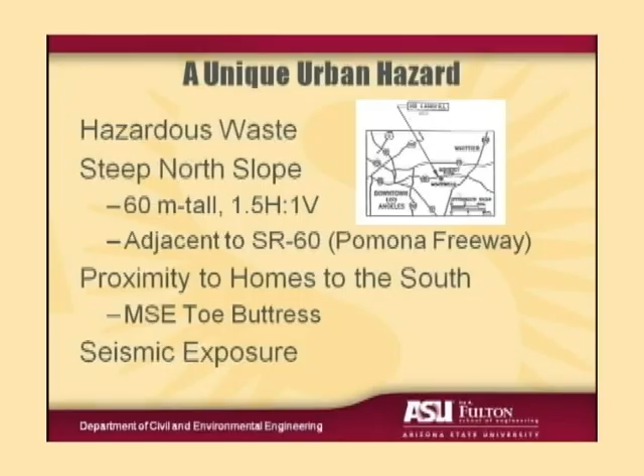And then there was a relatively severe seismic exposure for this site that I'll talk a little bit more about in a minute.

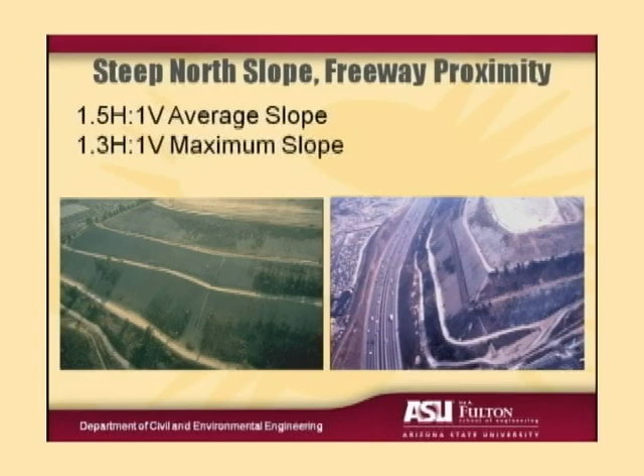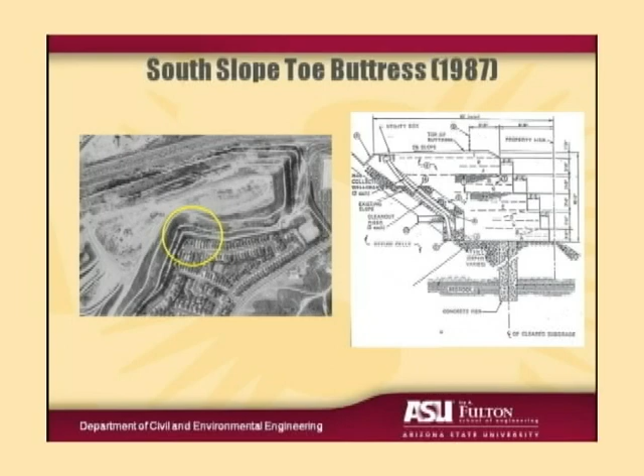The south slope toe buttress I mentioned, you can see in the yellow circle the proximity of the homes in that corner of the landfill. The developer had built right up to the landfill property. So a 15-foot high reinforced earth wall was constructed by Woodward Clyde Consultants in 1987, designed by Woodward Clyde, as an interim measure while the legal issues that always surround a Superfund site were being pursued.

In 1987, the Whittier Narrows earthquake occurred, and this earthquake was really a watershed event in terms of seismic hazard for the whole Los Angeles region. You know, California, everyone knows what the San Andreas Fault is, or most people do. It's what we call a transform boundary between the North American plate and the Pacific plate, and movement along that boundary is predominantly horizontal.

However, in the Los Angeles area, the fault makes a little turn, and the seismologists and geologists refer to that as the Big Bend. And so while the fault displacement is primarily lateral along the fault, in the area that bends, some of that has to be accommodated in thrusting by movement perpendicular to the fault. And that thrusting creates the San Gabriel Mountains over there on the left, and the Sierra Madre Fault, which breaks up to the ground surface.

But the Whittier earthquake occurred on a fault that was not previously recognized, and that had no surface expression. It was buried beneath the ground surface, it had no surface faulting. There were lines of hills at the surface that were a surface expression that in hindsight were an indication there was something going on in the subsurface. But there were no faults visible, and up until that time, the seismic hazard had been based on faults that had surface expressions, that had faulting at the surface.

Subsequent investigations following Whittier indicated that the LA basin is underlain by what we call blind thrust faults, faults that don't break the ground surface. And in fact, the greatest seismic hazard for downtown Los Angeles is one of these blind thrust faults with a capability of a magnitude of about 7, less than the San Andreas Fault, but much closer to the urban areas.

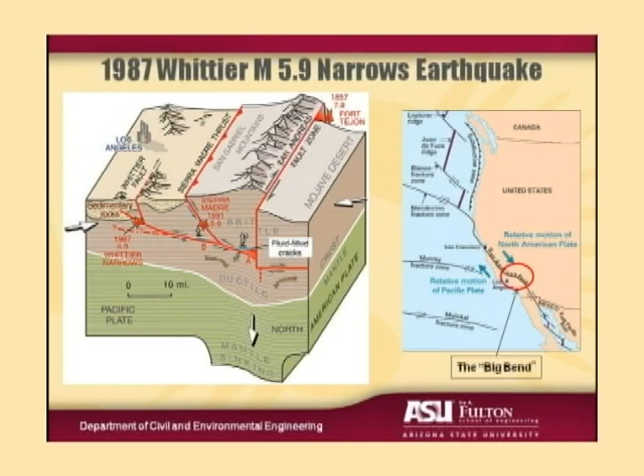And if you see over there on the left, on the ground surface, it says the Whittier Fault. The OII Landfill is right about the F in the word fault, very close to Whittier. In fact, Whittier caused some severe cracking on those benches on the steep north slope of the landfill, which of course triggered additional concerns over landfill stability.

One of the good things that happened after Whittier is EPA's consultant at the time, CH2M Hill, installed some strong motion stations at the landfill, one on top of the waste and one down at the toe of the waste on what they thought was natural ground. And that turned out to be a very fortunate thing.

The instrumentation really paid benefits further down the line in terms of evaluating the seismic performance of the landfill. And as I mentioned, Whittier also led to the identification of this blind thrust fault system that underlay the Los Angeles area. The particular blind thrust fault under the OII landfill was known as the Elysian Park blind thrust. And that represented a significant increase in the already severe seismic exposure of the site.

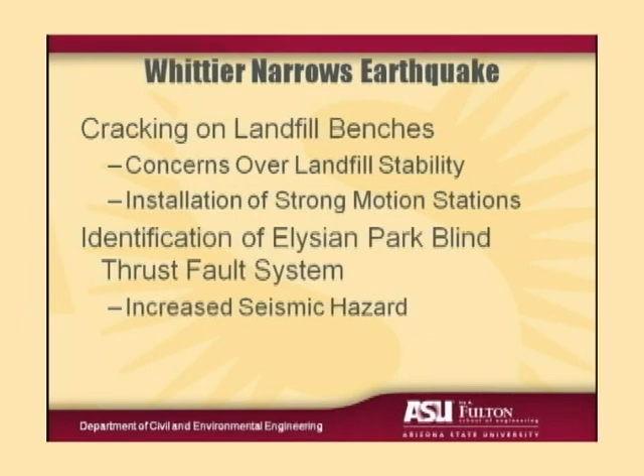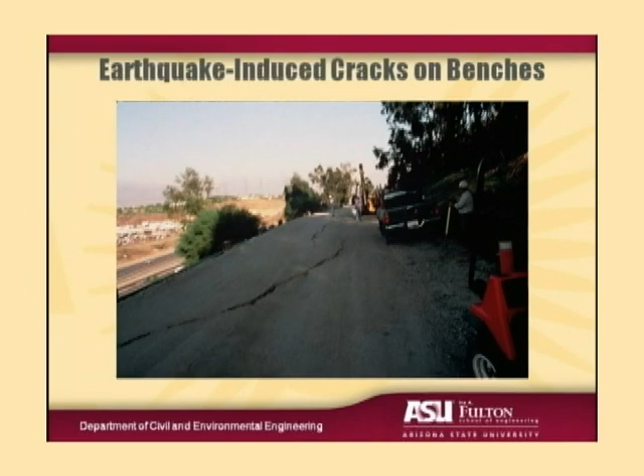Later on, when Professor Stokoe was out there with a 20-ton truck vibrating the ground, when they were on that north bench, I conveniently had to stay in the office that day. I told them, take lots of pictures and send them to me, and I'll check back with you at the end of the day.

So in 1994, my company, GeoSyntec Consultants, was hired to do pre-design analysis for the landfill, a pre-design evaluation in preparation for final design to help EPA decide exactly how they were going to close this site, what needed to be done. Some of the estimates of what needed to be done, including excavating the waste, cutting back to the waste, to a tune of $400 to $800 million. And of course, the responsible parties were hoping we could come up with a cheaper solution.

So our pre-design scope of work had 9 work elements. Of course, the first thing we do is review and synthesize the available information on the site. We had a field investigation program, a laboratory test program. We conducted limit equilibrium stability analyses, a detailed seismic hazard analysis, taking into account the new information on the blind thrust systems to establish a design earthquake for the site, used that design earthquake in a seismic response and deformation analysis for the landfill, conducted a static deformation analysis to see what the landfill would look like 30 years from now.

The responsible parties who were closing the landfill were also responsible for 30 years of post-closure maintenance and care of the facility. We had a specific investigation of the integrity of the toe buttress that was protecting those homes on the south, and then we had to issue a report of findings with recommendations for closure design.

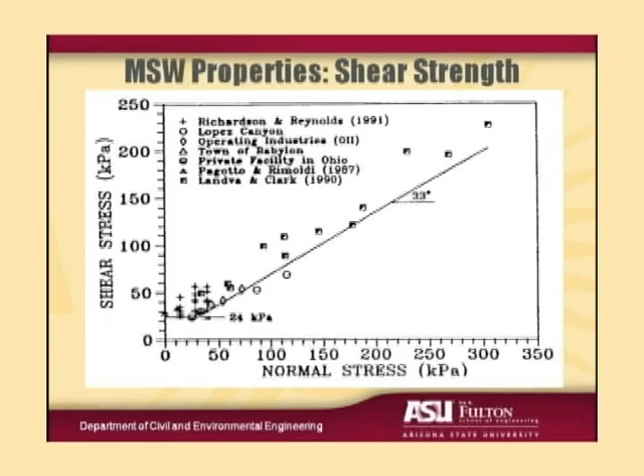This shear strength envelope is now widely used to represent the shear strength of municipal solid waste. So that was one of the first contributions to practice from this project.

We had a very detailed field investigation. As I alluded to, we conducted a spectral analysis of surface wave survey. We hired Professor Stokoe and his team at University of Texas to come and do the survey. We installed 3 34-inch diameter bucket auger borings to depths of up to 155 feet. This isn't cheap. We would have liked a few more borings, but we were able to convince the client to pay for 3 of them, and we did detailed waste characterization of the waste recovered in the bucket augers.

We conducted in-situ unit weight tests on the way down, and we did some video logging of the holes to get an idea of the structure of the waste.

We also did a large test trench at the surface of the landfill, 20 feet deep, 20 feet wide, to categorize the structure of the waste, and then we backfilled it with gravel to get an idea of the unit weight. We weighed the waste that we took out, backfilled it with calibrated gravel, like a big sand cone test, and used that as an estimate of the unit weight.

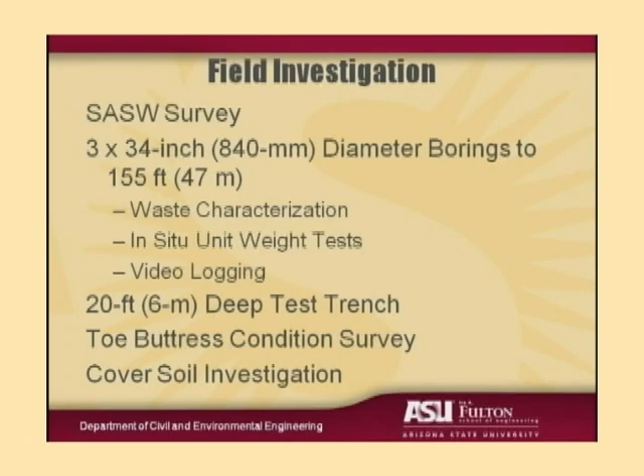We conducted a condition survey of the toe buttress and a very detailed investigation of the shear strength of that cover soil on the north slope.

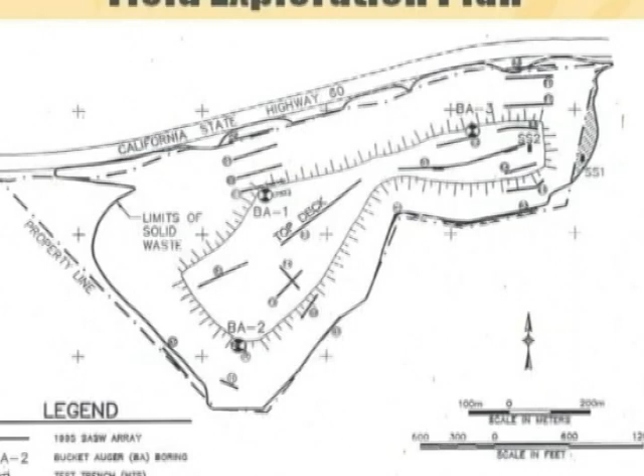BA2 in the lower left is the so-called seep area, southwest area, where the liquid waste was disposed of and where there were seeps on the surface after a heavy rain. BA1 was kind of in a transition zone between the areas where liquid was disposed of and the area where no liquids were disposed of.

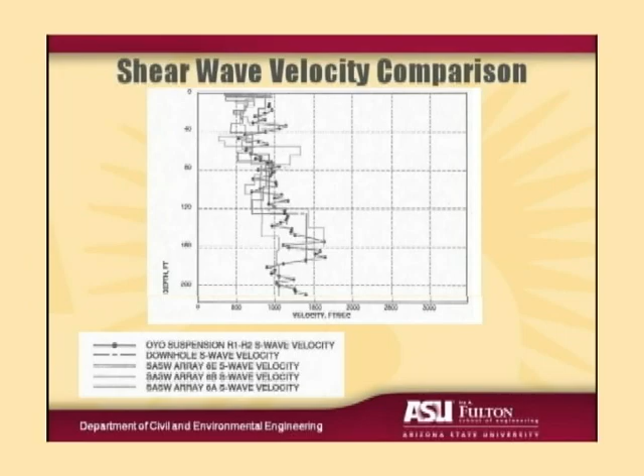Fortunately, SASW, I think people have generally accepted now. In 1996, it was still considered a relatively new technique. But where the seismic station was on top of the landfill, a previous consultant had put in a deep boring and had made downhole shear wave velocity measurements and measurements using the OYO suspension logger, which again was a relatively new technique at the time. So we were able to compare the shear wave velocity profiles from SASW to these other 2 techniques, and as this figure demonstrates, we got very good agreement, so we were able to move ahead using the SASW data with good confidence that it gave us results comparable to other geophysical techniques.

One of the things we use the shear wave velocity data for, besides the seismic response analysis, and besides trying to determine what the depth of the waste was, was to plan our sampling intervals.

We took the 27 shear wave velocity profiles we did around the landfill and averaged them. We did a statistical analysis. We got the mean trend, which is the solid line, and the mean plus and minus 1 standard deviation trend. We planned our sampling intervals to sample areas where the shear wave velocity, as measured in the site-specific measurements, was below the mean, close to the mean minus 1 standard deviation, equal to the mean, and greater than the mean, with the belief that this would be reflected by differences in the characteristics of the waste. By doing this, we would be sure to get a broad variety, or the complete spectrum, of the type of waste disposed of at the landfill.

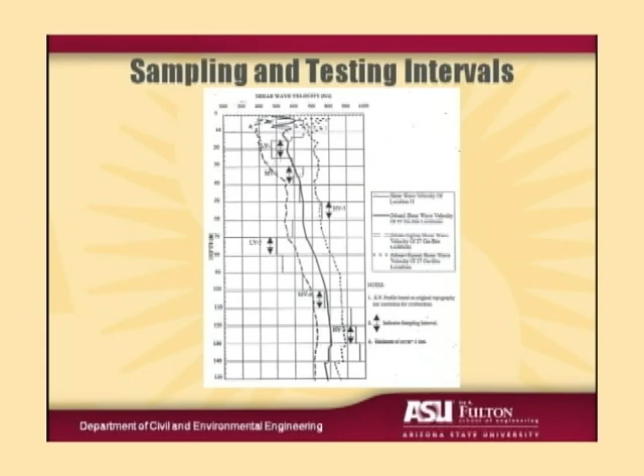So if you look at this figure, we took 6 bulk samples. We had 6 sampling intervals in each of the boreholes, so we took 18 sets of bulk samples. At each location, we did an in-situ unit weight test to capture the unit weight of the waste, and these were the samples we used for our laboratory testing program. The intervals marked LV were the low velocity samples, MV were the medium velocity intervals where we sampled, and HV were the high velocity intervals. We had 2 of each in each of the 3 borings.

The borings were done with a 34-inch diameter bucket auger, the big bucket auger. Typically we use these things in Southern California for slope stability investigations.

In the weak sedimentary rock, we put the big bucket auger holes in, then we put our geologists in a little cage, send them down the hole, and they map the strike and dip of the strata. They love it, they get real excited about that. But for some reason, they didn't want to go down these holes. I'm not sure why. We had trouble convincing the geologists to go down.

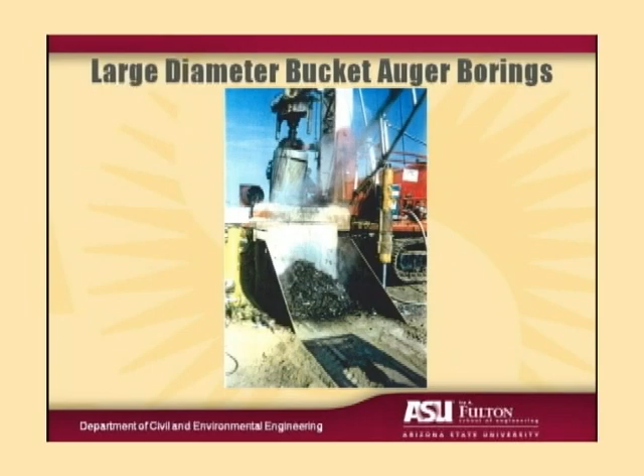As the waste came up out of the hole, we would empty it into this metal bin, and our field engineers would do detailed logging of the waste. We actually had to develop a waste classification system, since there is no standard waste classification system for solid waste. So we went through the literature, collected best practices, and put together this field classification scheme for the waste as it came out of the bucket auger.

It was classified in terms of its moisture content - damp, wet, or standing water in the hole - its compaction based upon how it fell out of the bucket, and the state of degradation based primarily on newspapers and printed material.

In fact, over in the boring in the dry area of the landfill, we pulled up two pristine tickets to a 1956 presentation of Cinderella in downtown Los Angeles. I wanted to go back to the box office and get a refund, but they told me that theater had been torn down about 15 years before and quite possibly now resided in the OII landfill.

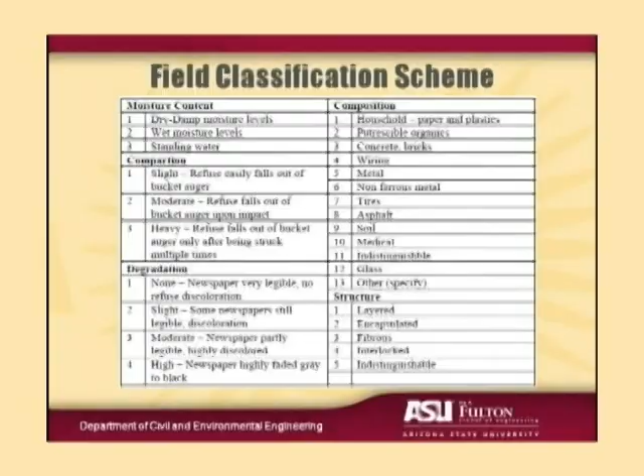We also categorized the composition of the waste. We had 13 compositional categories, including, of course, the other category. Sometimes we were able to capture the structure of the waste, whether it was layered or the solid waste was encapsulated in a soil matrix, although most of the time we used category 5, which was indistinguishable.

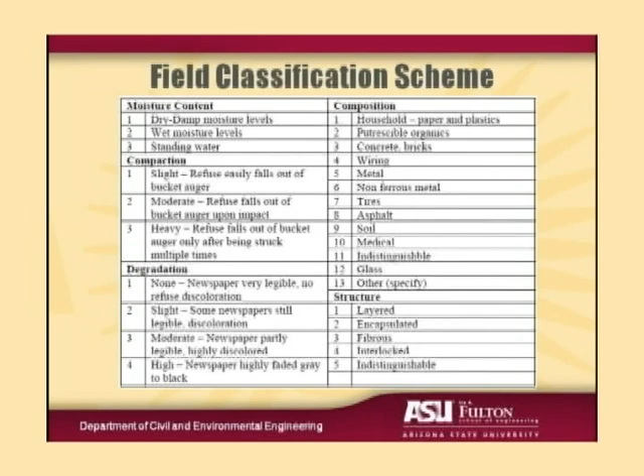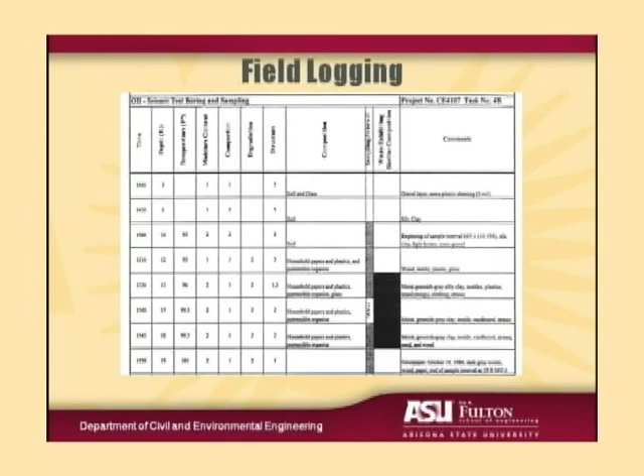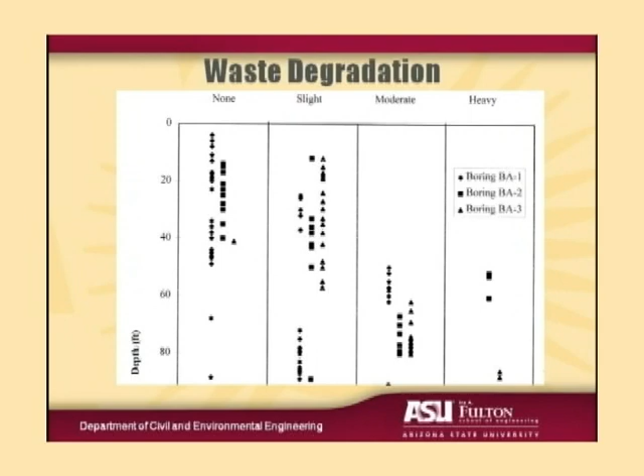We would hit pockets of standing water at shallow depth, punch through those pockets, and then encounter a dry zone with relatively undisturbed waste. So there was a very inhomogeneous character to the waste in the landfill.

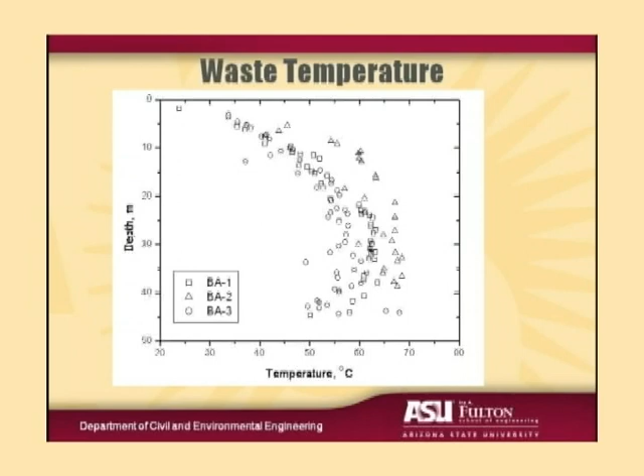Waste temperature is another important indicator of degradation. Anaerobic degradation produces temperatures on the order of 50 degrees centigrade, while aerobic degradation produces temperatures sometimes as high as 80 to 85 degrees centigrade. If you look at this temperature plot, note that BA2 is down in the wet zone, where we had a lot of moisture, and that's where we had the highest temperatures and greatest degradation. BA3 was at the dry end of the landfill, where temperatures were lowest but still elevated - you go down in the hole and it's 60 degrees centigrade, about 150 degrees Fahrenheit.

So the landfill was cooking. The waste was clearly degrading.

We developed an in-situ unit weight test that we've since used at several other landfills. It was basically a big sand cone test. We would auger the waste over a predefined interval of the borehole, typically 3 to 5 meters. The waste that came up in the bucket auger over that interval would be weighed at the landfill scales. We would put a tremie pipe in the hole and tremie in a calibrated, uniform gravel that we had previously calibrated to establish the unit weight at which it falls into the hole. We would weigh the amount of gravel put into the hole, weigh the truck before and after, and take the difference to back-calculate the solid waste unit weight.

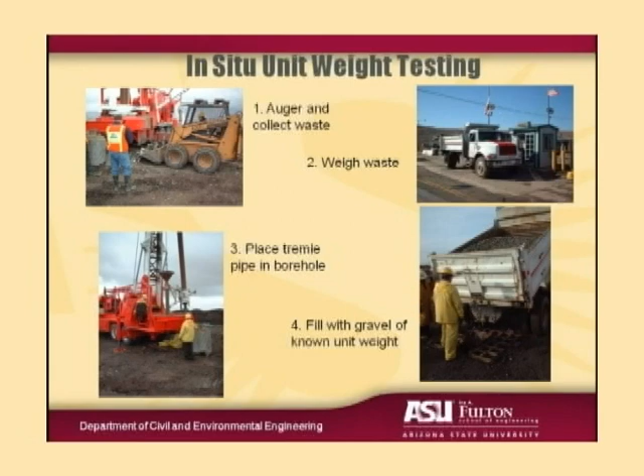That was some great field data for us, and we've since used that at several other landfills. There was a paper that appeared in the ASCE journal about a year ago on the unit weight of municipal solid waste that talks about this procedure and presents results from some of our landfill investigations.

These were the results at OII, pretty scattered. Typically you would expect the unit weight to increase with depth, if you had a uniform material. So the somewhat random nature of these unit weights reflects the variability in the waste.

We also show the unit weight we got in that large test trench at the surface. For engineering purposes, we characterize the unit weight as 15.7 kilonewtons per cubic meter, about 100 pounds per cubic foot for those who still work in imperial units. Importantly, that's significantly higher than the unit weights people used, and still use, in practice today.

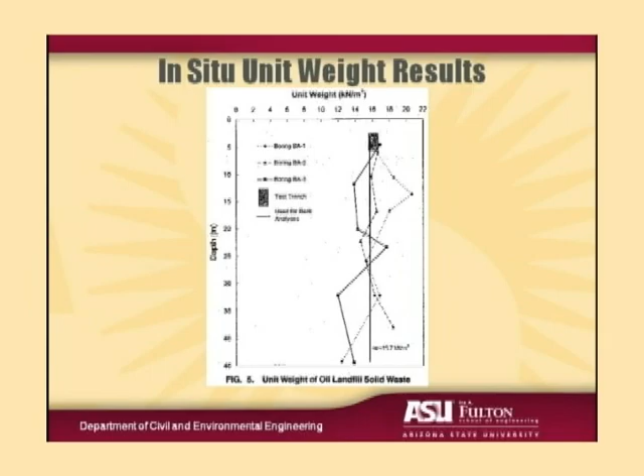Whenever I review these landfill designs, it's a battle. People go in at 55 pounds per cubic foot, and I say let's use 100, and we usually wind up about 85 to 90. But every time we go out and measure it, we tend to find it up in this range. In fact, working with Professor Stokoe, we correlated the shear wave velocity to the unit weight and got a pretty good correlation.

We used that correlation to take our shear wave velocity profiles and translate them into a unit weight profile for the landfill. The dark squiggly line is the mean value. We're also showing the mean plus one standard deviation, the mean minus one standard deviation, and the absolute maximums and minimums based upon this correlation.

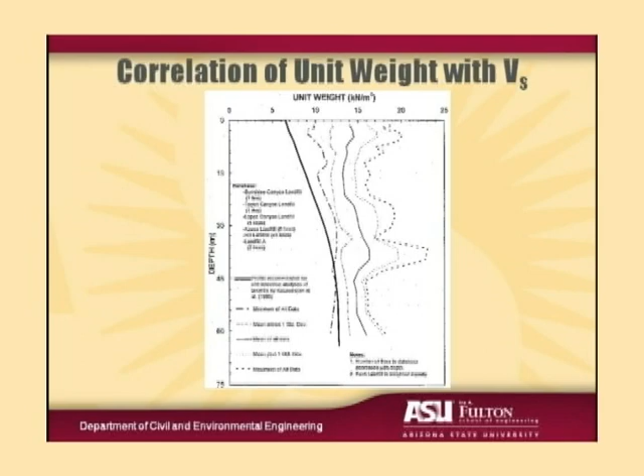The very dark line on the left was a unit weight profile we had proposed about 3 years before, without any data, that apparently is still widely used. In fact, when we presented this unit weight information in Europe and said that old 1995 Kavazanjian et al. profile isn't reliable, several of my European colleagues came running up and said, no, we like your unit weight profile, please don't change it. But this is the new story that I'm sticking to.

We did downhole video logging of each borehole. We hired an oil well logging company to come out with their camera and do a downhole video log. So I thought I would take a trip down the rabbit hole with you. Let's see if we're lucky and if we can get the video to work.

Here we are, taking a little trip down a 34-inch diameter bucket auger borehole inside the OII landfill. For the life of me, I can't understand why the geologists didn't want to go down that hole in a cage. And the mist you see in the background is condensation.

Remember, the temperature inside the landfill is on the order of 60 to 65 degrees, very moist due to landfill gas. That was fun, let's do that again.

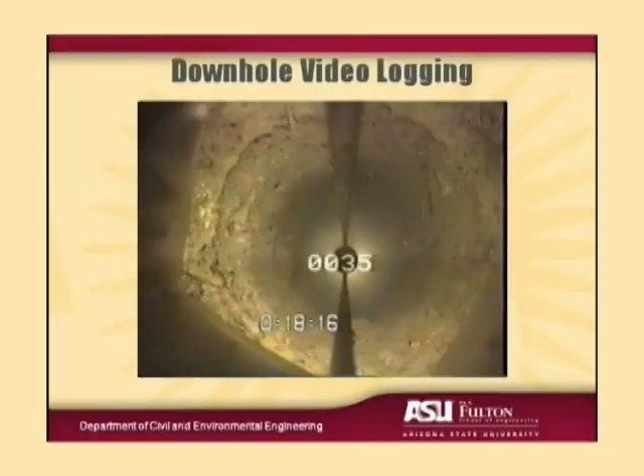I think I've got to cue it up again. You can see the structure of the waste, the relatively horizontal orientation of the fibrous materials, the fibrous waste sticking out of the sides of the borehole.

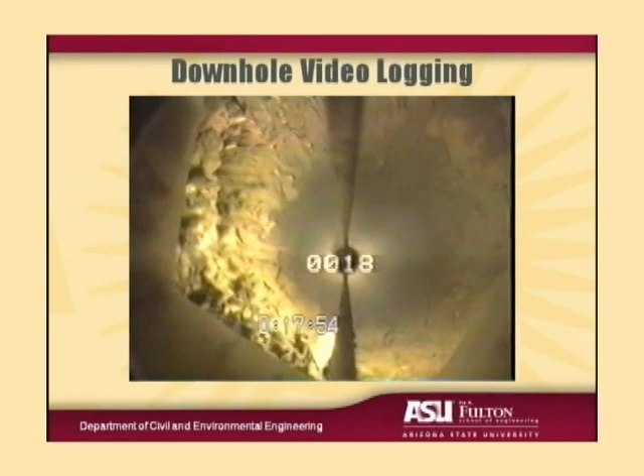That's about a 10-meter segment. The numbers in the middle of the screen, I should point out, show the depth in meters. We logged down to about 40 meters in the 3 boreholes.

Well, we took that waste and did some testing. We constructed an on-site laboratory to test 18-inch diameter, 457 millimeter reconstituted samples. Our original intent was to try and recover undisturbed samples. When the cost of recovering undisturbed samples, our estimated cost of the equipment, got to about $500,000, and we still hadn't figured out how we were going to extrude the samples from the stainless steel cylinders into the testing devices, our client said, come up with a better idea.

So we decided to go to reconstituted samples, reconstituting them to the field densities and then testing them. We had a consolidometer, a direct shear device, and a cyclic simple shear device.

Building that laboratory in itself was a major accomplishment. Professor Landva, who at the time was the leading authority on large-scale testing of solid waste, told us it would be 3 to 5 years before we would run our first test. The GeoSyntec staff in Atlanta, led by Bob Bachus, with help from Rob Swan and Dennis Vanderlinde, designed and fabricated that equipment in less than a year and got the first test going. That in itself was a major accomplishment.

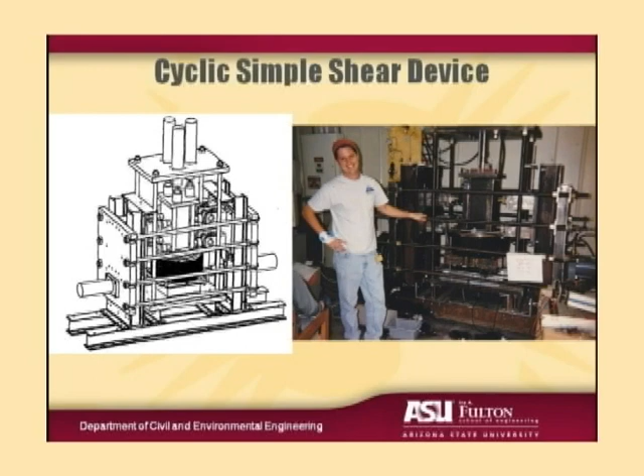After every lab test, we did detailed characterization of the material. We would take the bulk sample, break it up into its constituents, and sort it into paper, plastic, metals, glass, and then what we called soil and soil-like material, because it was a fine-grained material, but there was no guarantee it was soil. In fact, a lot of it was degraded waste.

One of the surprises for us on this project, and it's been repeated on many other landfills, was the large percentage of soil and soil-like material that's in the waste. To a certain extent, it reflects the amount of soil that typical landfill owners put onto the landfill, but it also reflects the state of degradation of the waste. I think at OII, the average amount of soil and soil-like material was on the order of 80% by weight, less by volume, of course.

And we had some samples that were as much as 99% soil and degraded waste material, representing down from the wet end of the landfill and representing a very high state of degradation. And that had an impact on the properties, as I'll show you in a minute.

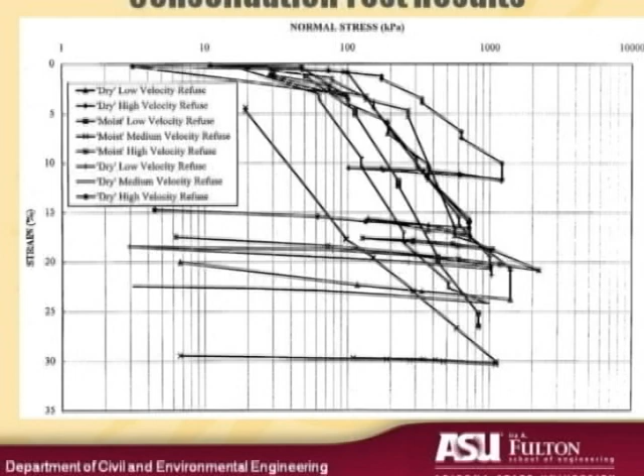These are the consolidation test results, a little bit all over the map. The one thing I'll point out is that on unloading, there's very little recoverable strain. Most of the strain in loading is irrecoverable. So we do the loading and then the unloading cycle, and you can see from that bottom plot, very little vertical strain on unloading.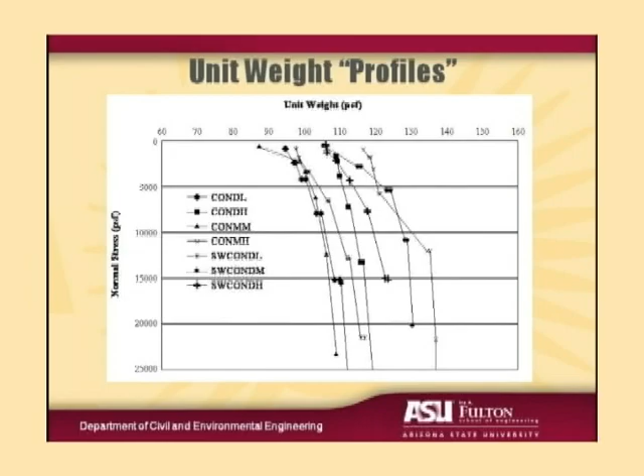If you take an average unit weight of 100 pounds per cubic foot, you take the vertical axis on the left-hand side and just knock off 2 zeros. So 5,000 PSF is 50 feet, and 10,000 PSF is 100 feet. You can see if the waste composition stays constant, you do get a nice increase in unit weight with depth. That's just another indication that the waste within the landfill itself was very variable, which is why we got that high variability in unit weight as we went down into the ground.

These are the direct shear test results. What I'll call your attention to here are the numbers in the boxes. The numbers in the boxes represent the percentage of distinguishable solid waste in the material. So if you subtract that from 100, that gives you the percentage of soil and soil-like material.

At our lower bound envelope, which had a cohesion intercept of 43 kPa and a friction angle of 26 degrees, you'll see two numbers, 1% and 7.8%. Those were samples where between 92 and 99% of the material was soil or degraded waste, and those were the lowest strength materials.

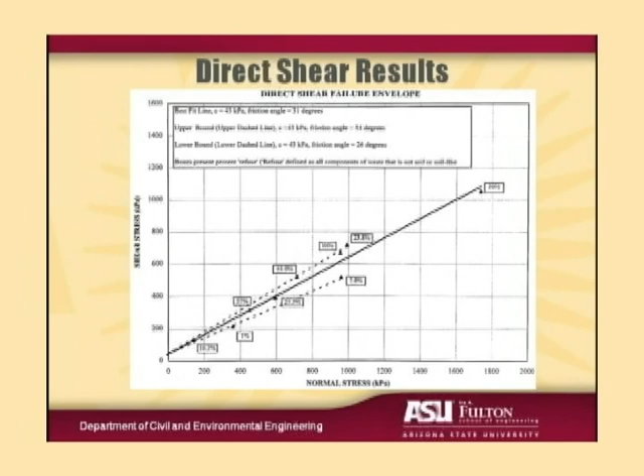The dashed line on the upper bound shows a 90%, and that was certainly the sample with the greatest amount of refuse in it. So there's some scatter in this plot, but there does seem to be a general trend between the strength of the material and the amount of soil and soil-like material versus the amount of waste material. We just completed a collaborative research project with the University of Texas at Austin and Berkeley, where we reconstituted samples with different proportions of refuse and soil-like material that basically confirm this trend in material behavior.

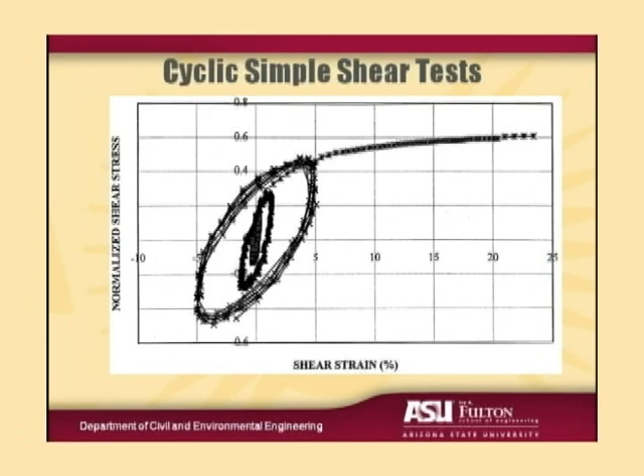The cyclic test, of course, what we want are the hysteresis loops. From the area of those loops, we get the damping. From the secant through the tips of the loops, we get the modulus, the strain-dependent modulus. So we would typically test at 3 different strain levels and then monotonically load the sample to failure.

The lowest resolution we could get in this cyclic simple shear was about 0.1% shear strain. Typically, when you plot this stuff for earthquake engineering, you want to go down to 0.001% shear strain. So the testing gave us the high strain properties of the material.

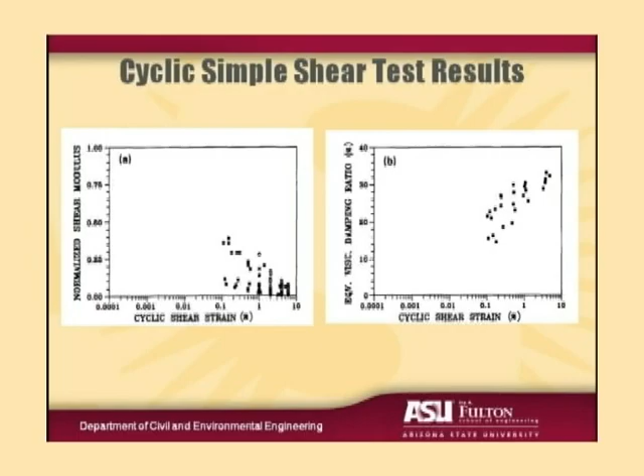On the left-hand side, we're plotting the normalized shear modulus - the shear modulus measured in a test divided by the maximum shear modulus, the small strain modulus. The right-hand side, we're plotting the damping ratio. This was only part of the story, and we needed to fill in the rest of that curve in a small strain range. And that's where the strong motion records came in. Without them, we probably would have been lost.

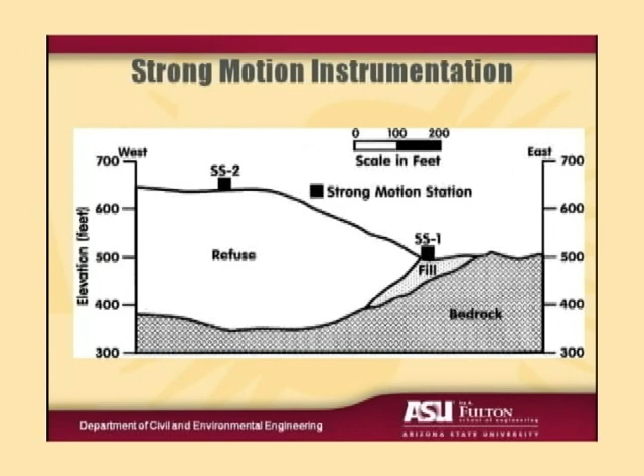So these are the 2 strong motion stations shown with the cross-sections of the landfill. I think when I first mentioned the strong motion stations, I should have said that the one at the toe of the landfill was ostensibly placed on bedrock, and that's part of this story. You'll see here it shows it placed on fill. Originally, we assumed that station was placed on bedrock, and in fact, some of the previous analysis made that same assumption.

This is a plot from a paper by Tim Siegel, Don Anderson, and others at CH2M Hill that was in the Slopes and Embankments Conference in 1992, where they're looking at spectral amplification of the earthquake motions. They take the earthquake time history at the base station and at the top of the landfill, do a Fourier analysis, and break it down into sine waves.

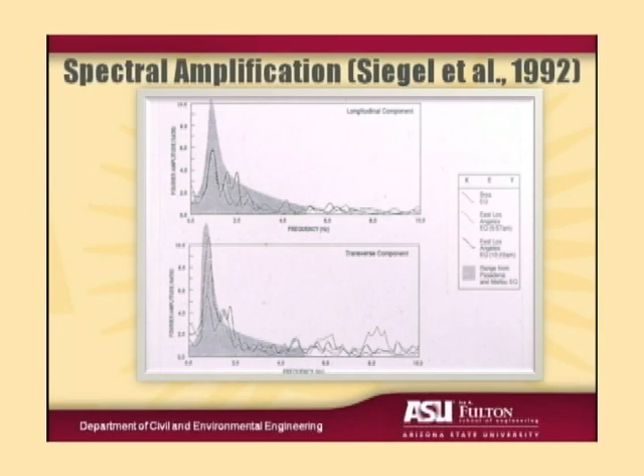And then at a given frequency, they look at the ratio of the sine wave that represents the motion at the base and the sine wave that represents the motion at the top. That ratio we call the amplification ratio. If they're the same, it'll be 1. Here you see spectral amplification on the order of 10 or 11 at about 1 second. That 1 second represents the natural period of the waste mass.

In fact, if you take the average shear wave velocity from Professor Stokoe's soundings and put it into one of my favorite formulas - that the natural period is 4 times the height of the landfill divided by the shear wave velocity - you come out with exactly 1 second. So this was some work done by CH2M Hill, but this work assumed that base station was on bedrock.

Another typical plot you see in earthquake engineering to represent amplification shows the amplification at the ground surface for different soil conditions versus the theoretical amplification of a hypothetical bedrock at the ground surface. If you had bedrock at the site, you'd have a 1-to-1 line here, a 45-degree line. The open squares here represent the point you get if you assume that the base station at OII was on bedrock, and it doesn't show any amplification.

In a couple of cases, there's no amplification - the motion was the same. But in other cases, the motion at the base station was significantly less or significantly more than the motion at the top of the landfill. The problem is when we look at those base station motions, they were much higher than they should have been.

For instance, the open square that's highest on the plot represents the Northridge earthquake. At that base station, it was about 0.25 g, 0.25 the acceleration of gravity. If you used a standard earthquake attenuation relationship and took into account the magnitude and distance, that should have been about 0.1 g. So something strange was going on. The motions at the base station were much higher.

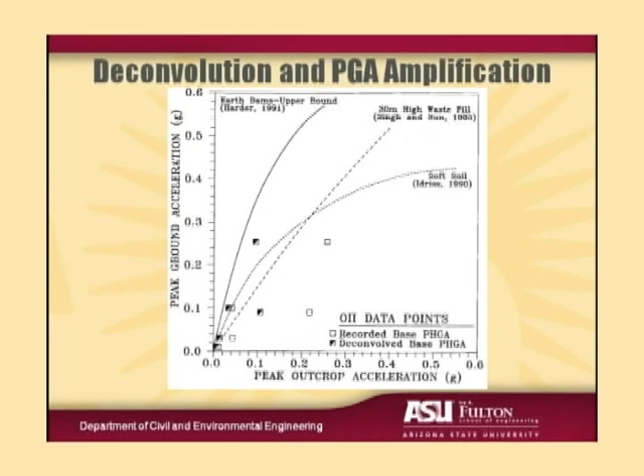When we use that as the reference for the plots, all of those open squares move over to the left, to the point where we are showing amplification at the top of the landfill. In fact, it looks very much like a curve that Les Harder developed for amplification at earth dams. What does that mean? That means you could have a 0.1 G acceleration at the base of the landfill, which according to EPA is the threshold for when you need to do a seismic analysis. With amplification potential at the top of the landfill, you could be looking at 0.3 to 0.35 G, 3.5 times what you're measuring at the base. That's pretty significant.

So after we did the deconvolution, we wanted to do a back analysis to get the small strain properties of the waste. So we built a finite element model of the landfill using Quad 4M, and not just because Professor Idriss was on the review panel, but because we thought that was the best program available at the time. We put in shear wave velocities based on Professor Stokoe's survey.

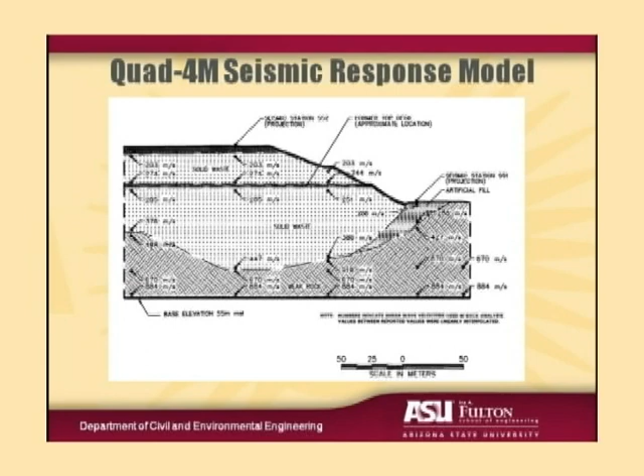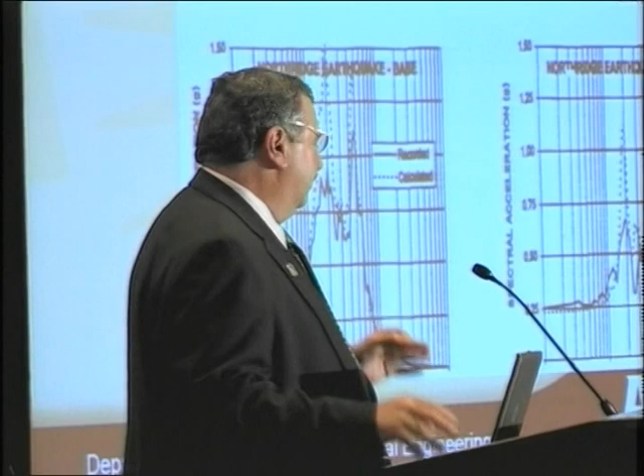Something you learn when you do back analysis is you can have too much data. If we only had one set of strong motion records, the back analysis would have been a piece of cake to find the best fit properties. Unfortunately, we had 8 sets of strong motion records. So I could get good agreement with one set, and when I used those same properties with another record, it was miserable. So it was a major task to find the balance between those 8 sets of records, and for that I'll credit Neven Matasovic at Geosyntec, who did yeoman's work on these back analyses.

These are just 2 typical records. Besides having 8 records, we had 2 points of reference: the station on the bedrock, on the fill, and the station on the top of the landfill. If I matched the station on the fill, it didn't necessarily match at the top of the landfill. If I matched it at the top of the landfill, it didn't necessarily match at the fill. So it was a real balancing act to optimize the properties.

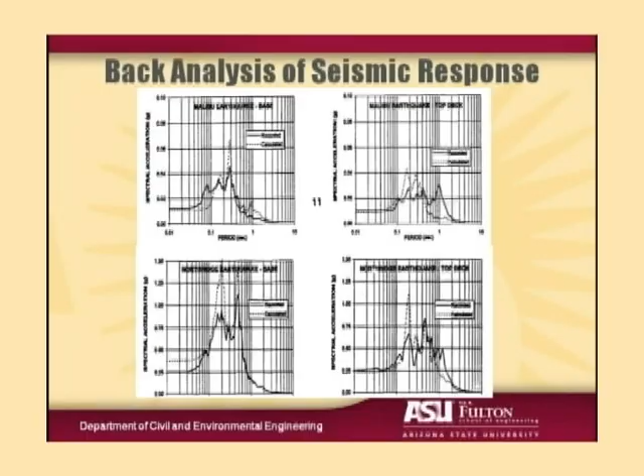These represent 2 of the comparisons with our best fit properties. On the left-hand side is the match at the base of the landfill, the solid line being what's measured, the dashed line being what we predicted; on the right-hand side is the top deck. If you look at all 8 records together, you wouldn't see any resolution - it was a pretty good balance. Over all the period ranges, sometimes we were low, sometimes we were high, but on average we were matching the response of the landfill.

Well, if we go back to my modulus and damping plots, the dark solid lines represent our best fit properties from the back analysis.

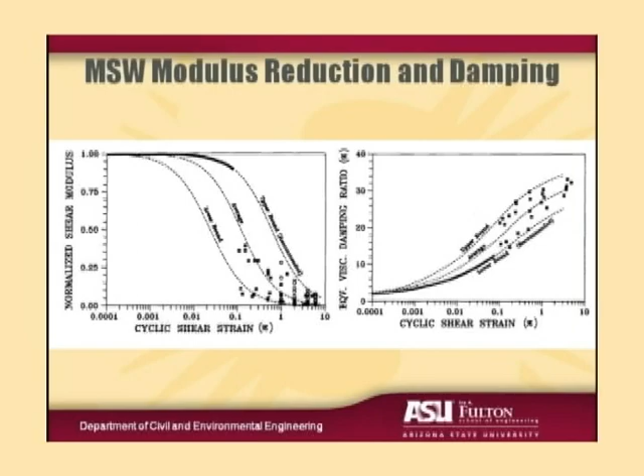From our laboratory tests, we developed a family of curves to represent modulus reduction and damping: upper bound, average, and lower bound. But based on the back analysis, our best estimate was upper bound modulus reduction and lower bound damping curve. Those two are compatible, the upper bound modulus goes with the lower bound damping. So we looked at that full range of curves, but our best estimates were based on the upper bound modulus and lower bound damping curves.

We also did extensive limit equilibrium analyses, including static analyses to get the static factor of safety. In those analyses, we considered that the waste is likely weaker on a horizontal plane than on a vertical plane because of the preferred horizontal structure of the waste, and also because of horizontal soil layers of daily and interim cover in the landfill that could represent planes of weakness.

We used perched water levels. The maximum height of perched water we encountered in our exploration was 8 feet. So every time we looked at a horizontal failure plane, we would perch 8 feet of water, putting a hydraulic head on that plane as part of the analysis. Then, because of concern over those north slopes, we did veneer stability analyses for the cover.

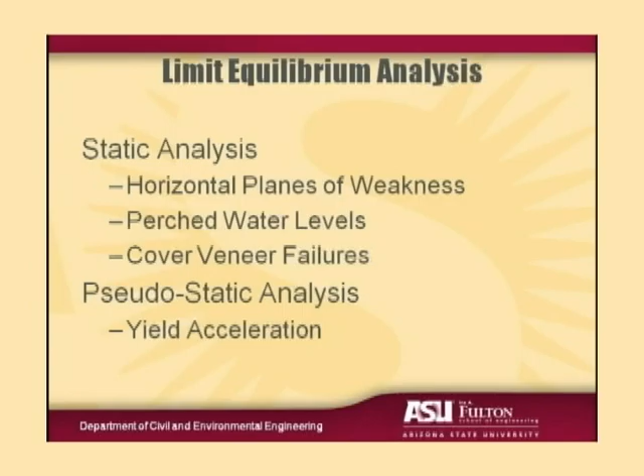For the seismic analysis, we evaluated the yield acceleration for a variety of different failure mechanisms. In the static analyses, the failure surfaces through the waste mass were all satisfactory. The lowest factor of safety we got, even on that steep north slope, was on the order of 1.9 to 2, so we weren't worried about the static stability of the waste mass.

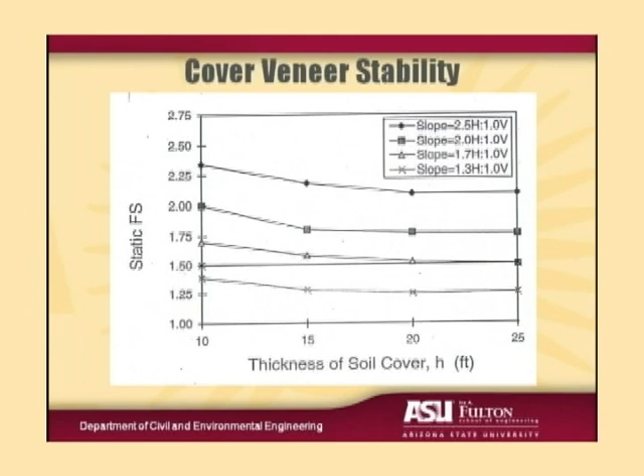However, the cover veneer stability was problematic. It depended on the thickness of the soil cover as well as the slope. On the steep areas of the north slope, the 1.3 to 1.5 to 1 slopes, it was below what we considered acceptable, below 1.5. This is without any tension cracks, or tension cracks full of water. Once you account for potential cracking, and a rainstorm filling a crack with water, these factors of safety were dropping pretty close to 1.

The pseudostatic analysis gets a little complicated. Probably the biggest mistake I see when people do a seismic pseudostatic analysis is they look for the surface with the lowest yield acceleration and assume that's the surface critical in the earthquake analysis. Not true. The critical surface is the one where the ratio of yield acceleration to the average acceleration from the earthquake is smallest, and that average acceleration depends on the size of the failure mass.

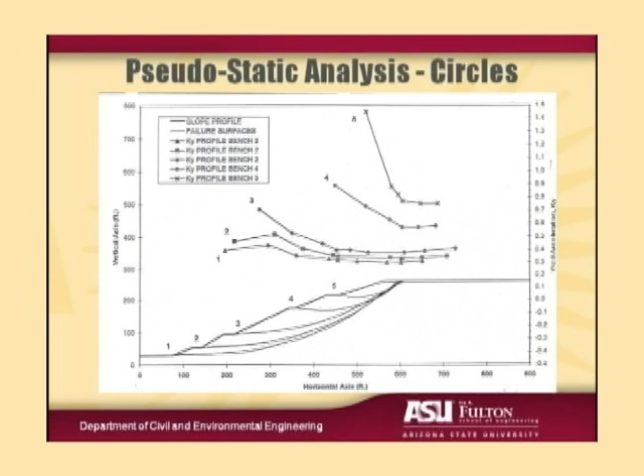So we did a series of circles from different benches, moving the circle progressively back, making it bigger and bigger. The bigger circles have a lower yield acceleration; the smaller circles have a higher yield acceleration, but also a higher earthquake acceleration. So you can't say a priori which one is more critical - you need to look at all the different cases when you do the analysis.

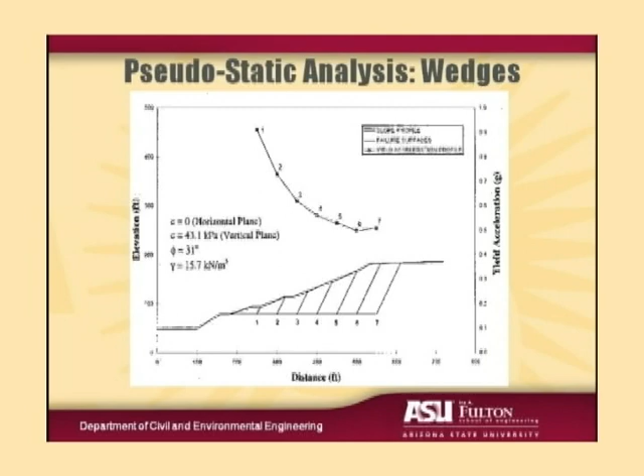So we looked at a family of circles, and we looked at families of wedges. From each bench, we took a series of wedges to get the yield acceleration, and we have to compare that to the seismic loading.

The seismic loading turns out to be governed by these blind thrusts. This is a picture of the known earthquake sources in the vicinity of the landfill. You see the landfill there in the middle, sitting right in the middle of the Los Angeles segment of the Elysian Park blind thrust. The fault was estimated to be 11 kilometers directly below the landfill, capable of generating a magnitude 6.9 earthquake.

Using the available attenuation relationships, that meant we would have a 0.69 G acceleration at the ground surface for the maximum credible earthquake - the largest expected earthquake in the known tectonic framework, which is the design earthquake for hazardous waste landfills in California. So that was our design event.

We took a family of 5 time histories to represent the design event and put them back into a finite element model. We took the ground surface records down to depth with SHAKE, and then took the SHAKE motions and put them at the base of our model, bringing them back up through the landfill.

We calculated the average acceleration for the different blocks that represented our pseudostatic yield acceleration blocks. Some of the blocks are concentrated on the north slope. We had different blocks with different veneers within the cover, including wedges and circles, shallow wedges and deep wedges. On the south side of the landfill, we had a global surface through the toe buttress, and a very local surface through the toe buttress.

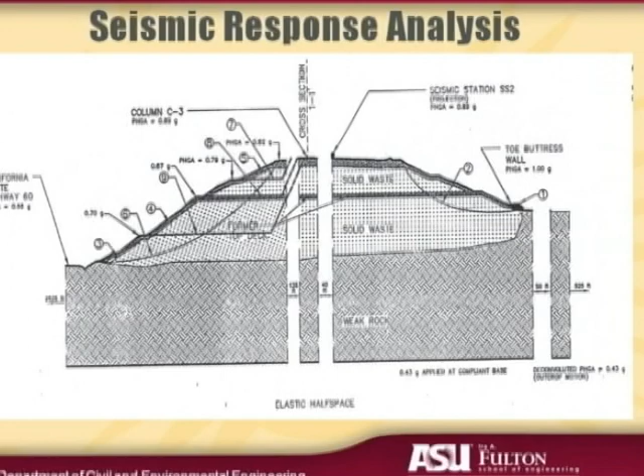But look over at the right side. The highest acceleration in all our analyses was the toe buttress. That's what our structural friends would call hogging the load. The toe buttress was a very stiff element within this very soft and ductile waste mass. So when this thing starts to shake back and forth, the stiff member attracts the most load. The peak accelerations in that toe buttress were always the greatest, not necessarily good news for the people living on the south side of the landfill.

To bring it all together, we take the average acceleration time histories in those different blocks and run it through a Newmark analysis. We get this curve of displacement versus yield acceleration. Then we go back to our pseudostatic analysis, take the yield acceleration, and pick off seismic displacements. Almost all of our seismic displacements were in the range of 3 to 12 inches. Based on our experience with past earthquakes, supported by our technical review panel, that was considered acceptable. 12 inches of seismic displacement in this large ductile waste mass - I should mention that this type of analysis is generally conservative and overestimates the actual seismic displacement - was considered acceptable seismic performance for this and the maximum credible earthquake.

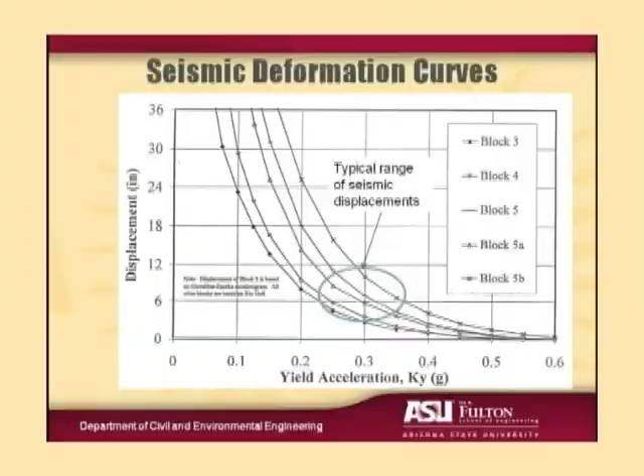We used to say, well, all the bridges will fall down and none of the hospitals will be operating, but our landfill will still be standing.

We also did a very sophisticated static finite element analysis to try and predict the 30-year performance of the final cover. The concerns there are maintaining drainage grades and cracking of the soil cover on the north slope, and also to try and predict the 30-year performance of the toe buttress, both statically and what would happen if, after 30 years of settlement, the toe buttress got hit by the design earthquake. So we superimposed the seismic loading on top of the static deformation after 30 years.

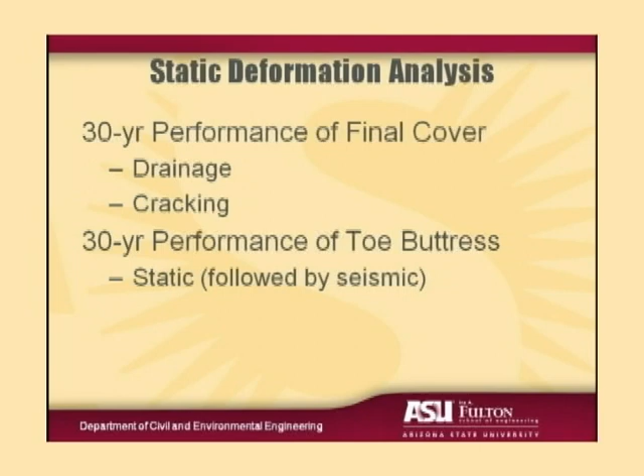So we did back analyses of the measured deformations of the landfill, including those inclinometers, to get some best fit properties to plug into this model and then predict forward for another 30 years. We also had a 1980 era load test where they loaded up one of the benches as much as they could and measured deformations to calibrate our model on.

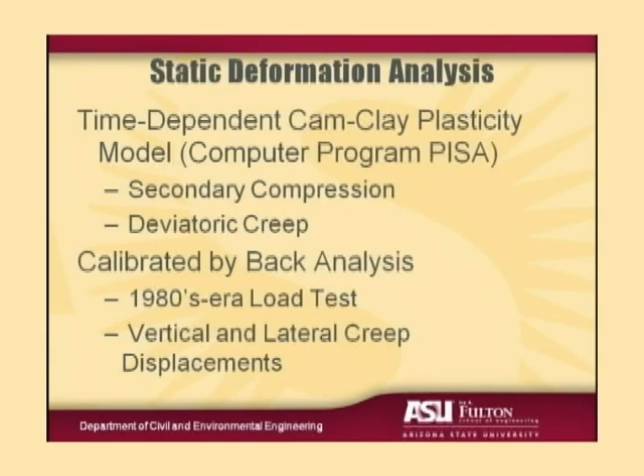Unfortunately, the calibration wasn't particularly successful. Here you see vertical and lateral displacements at one of those sections where we had inclinometers. The diamonds represent the actual measured displacements, which are pretty non-uniform and inhomogeneous. We could fool around with the properties - this shows 3 different sets of properties we used to try and match those displacements. We could match the horizontal displacement, but then wouldn't match the vertical. We could match the vertical, but then wouldn't match the horizontal. We could match the horizontal over one portion of the record, but not over the entire section. So I have to say we were probably most disappointed in the results of these analyses.

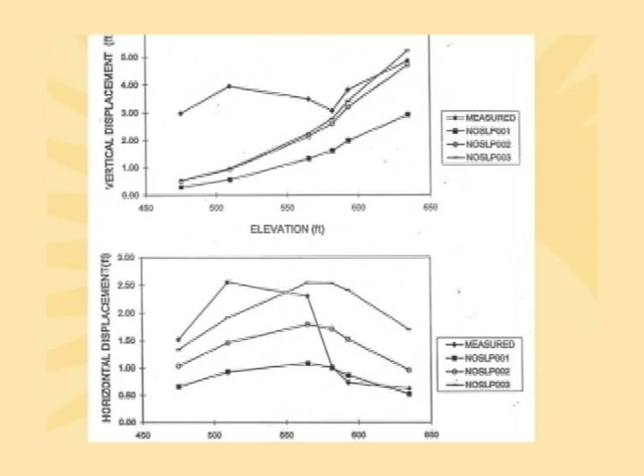But I think we did learn from that, waste deformation is actually very inhomogeneous. Different parts of the landfill at different times are decomposing. It's a very non-uniform process, and that leads to very non-uniform deformations.

One of the reasons we did the deformation analysis is we wanted those 30-year deformations to impose on a toe buttress. So let's jump over to the toe buttress. Global stability looked good, factor of safety 2.6. So our concern was internal stability, the strength of the geogrids. And to analyze that, we used a finite element program from Berkeley called GeoFEAP.

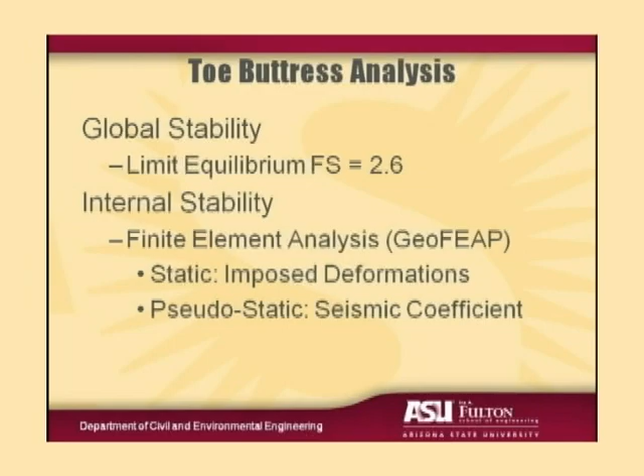I should mention that there were 2 toe buttress sections. There was one section supported on drill piers because the ground dropped away as you moved away from the landfill. That's where stability was believed to be critical, so when Woodward Clyde designed this buttress, they put 3-foot diameter drill piers filled full of concrete at 6-foot spacing.

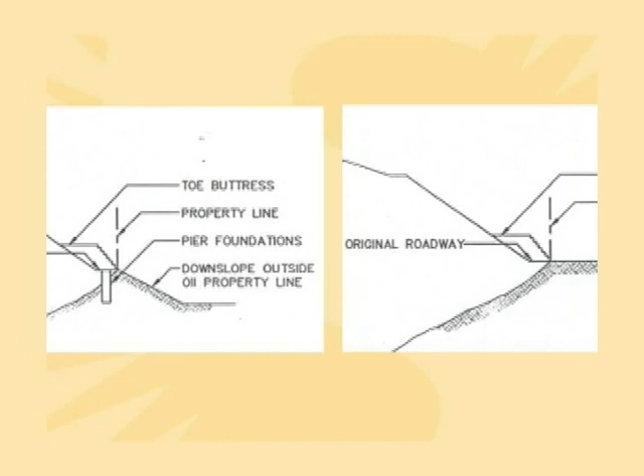So this is a Deep Foundations Congress. I guess it's good that I have some deep foundations in here, huh? Over on the right-hand side, part of the section, the ground was level, and that wasn't quite as critical.

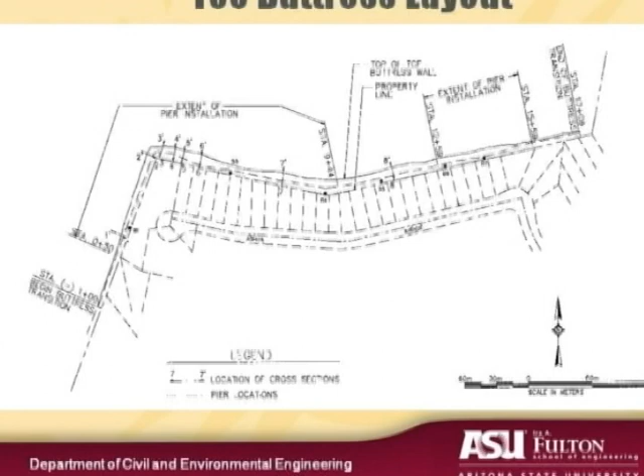This is the layout of the toe buttress showing the extent of the pier installation, 2 different sections where we installed piers, and then showing 8 sections where we had measured deformations. We had survey data on the deformations of the toe buttress from 1992 and 1997.

So we took those 2 sets of measured deformations, and being good geotechnical engineers, we put them on a semi-log plot and drew a straight line through them and projected out to 30 years. We got a couple of points there that show heave. I'm not sure I believe that data. Most of the points show relatively modest settlements, relatively modest, 3 feet, 4 feet.

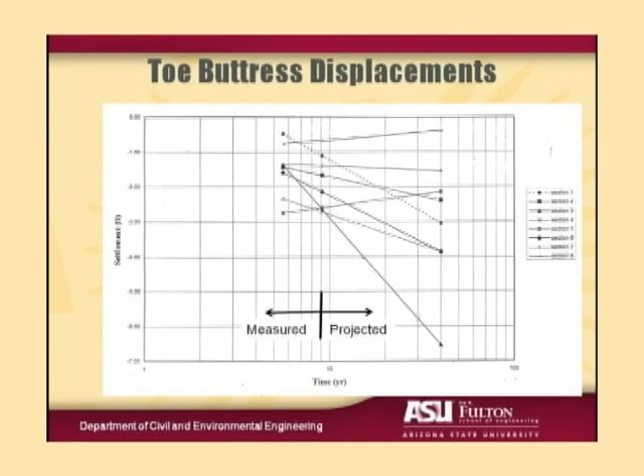And then the one station, Station 8, shows up to 6.5 feet of settlement if we project on a straight line plot for 30 years. And in fact, that's what we used for design. So we subjected our toe buttress to 6.5 feet of differential settlement between the top and the bottom, and then we put the design earthquake on it.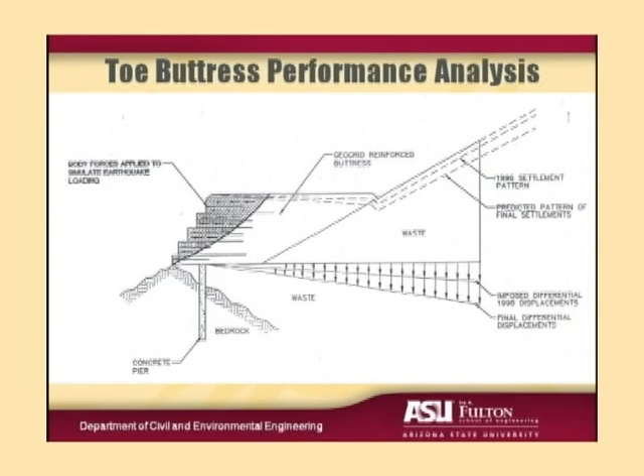And then we superposed the seismic loads as a pseudostatic load over the hatched area, which our limit equilibrium analysis indicated was the critical wedge. That resulted in tensile strains in the geomembrane, in the geogrid, which we then compared to the strength of the geogrid. But the question was, what strength should we use for the geogrid? It will have been undergoing creep for 30 years at that point, so what was a reliable strength to use?

So we did some creep tests on geogrid, and this was the actual geogrid used in construction of the toe buttress. The geosynthetic companies, God bless them, they archive samples when they have a major project like this. So we were able to contact Tensar and get samples of the actual grid that was used in construction of the toe buttress. We took those grid samples and did about 4 or 5 of these tests.

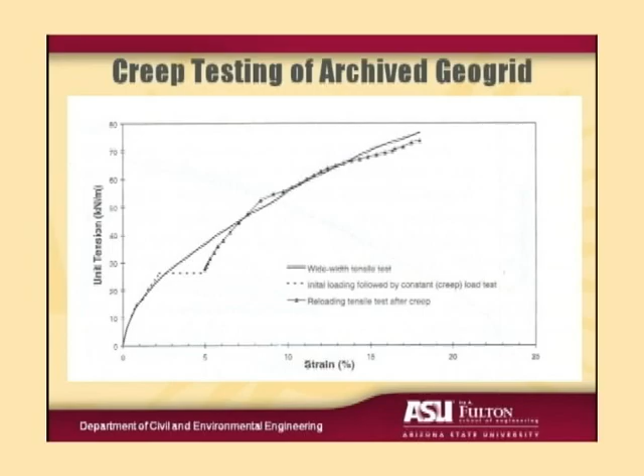We did a wide width tensile test, an immediate short-term loading test to get the solid line, and then we would do creep tests. I think the longest creep test was up to 6 months. We had a project schedule to meet. But the important finding was that when we reloaded it after creep, much like soils, we had an initial stiffening of the response, but eventually it essentially came back to the static stress-strain curve, the immediate loading stress-strain curve. You'll notice here that we would get out to strains on the order of 15 to 20% without rupture of the geogrid.

Well, this slide summarizes the deformations from our analysis. We built up the geogrid and the toe buttress in sections, so we were predicting strains at the end of construction. We had the current condition for the current measured settlement, the final differential settlements after we put that 7.5 feet of differential displacement on it, and then the earthquake loading.

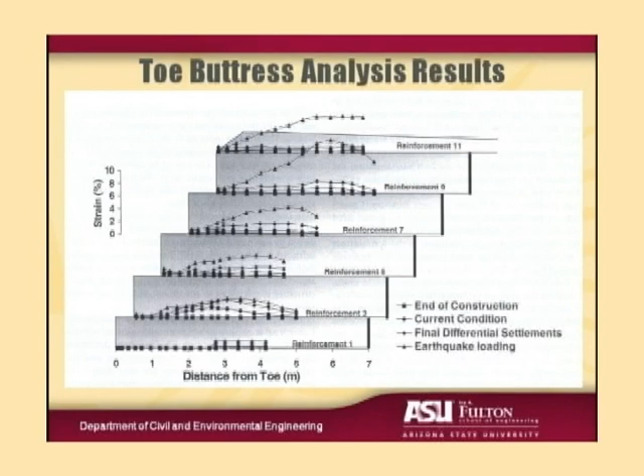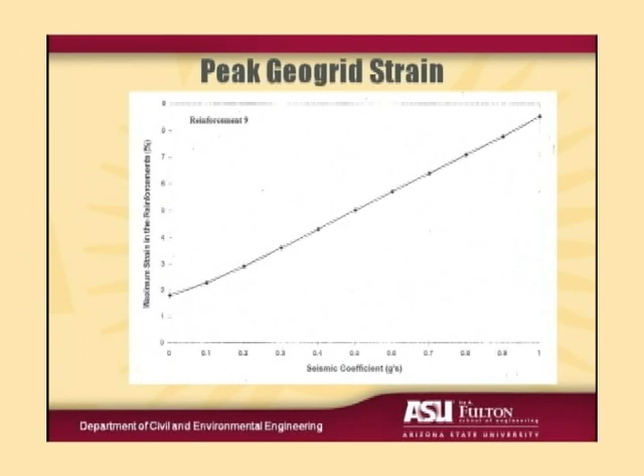You can see reinforcement level 9 is the critical level, with an axial strain on the order of 10% in the geogrids. In fact, I have a slide with a seismic coefficient of 1G, which is what we used because that's what our finite element analysis indicated. We were getting strains on the order of 9% in that geogrid. We ran the test out to 20% without rupture, so our interpretation was that the performance of the toe buttress was adequate, even if after 30 years of differential settlement it got hit by that design earthquake.

All right, well, we're getting near the end here. Findings and recommendations. We had to pull all this stuff together and make some recommendations for design.

The first finding, and a very significant one, was that the waste mass itself met static and seismic stability criteria. As I mentioned before, that was important because the remediation costs, if it didn't, were estimated to be between $400 and $800 million. So I think we earned our fee right there. And thanks for that, we were allowed to bid competitively on the next project for these owners.

Large static deformations are expected, so we told the owner they need to be prepared to do continuous maintenance over the next 30 years. Kind of a no-brainer, but those cover soils are going to crack, and you can't let those cracks stay open. If they fill with water in a storm, you still have a significant chance of veneer failures. We had the freeway down below, so you're continually going to have to adjust the drainage grades. Your gas wells are going to break all the time, so you're going to need a full-time maintenance staff addressing these issues.

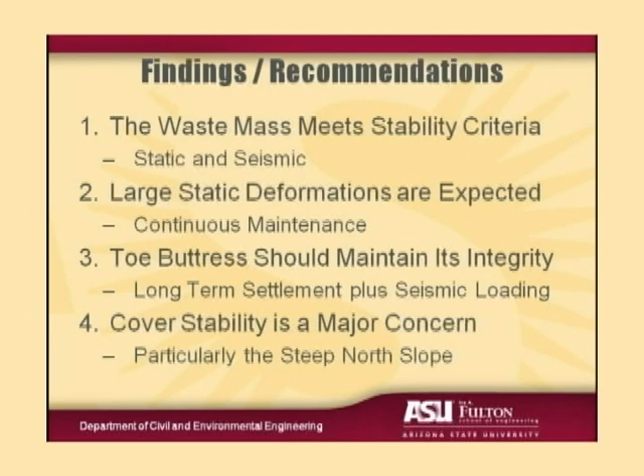The toe buttress should maintain its integrity. Even after 30 years of settlement plus seismic loading, we were confident that the toe buttress would maintain its integrity. That was good news. But cover stability was a major concern, particularly on that steep north slope. In fact, as part of final design, all of the soil on that north slope was stripped off, stripped down to the waste. We anchored geogrids back into the waste, built up vertical geogrid walls on the benches so we could flatten the slopes between the benches, and then even the soil veneer itself was anchored back into the waste with geogrids. But that's a different story.

All right, so building on what I learned from Professor Peck, I wanted to summarize all of this in one 8.5 by 11 page. But in fact, I settled on 2 PowerPoint slides. So what were the lessons that we learned from this project?

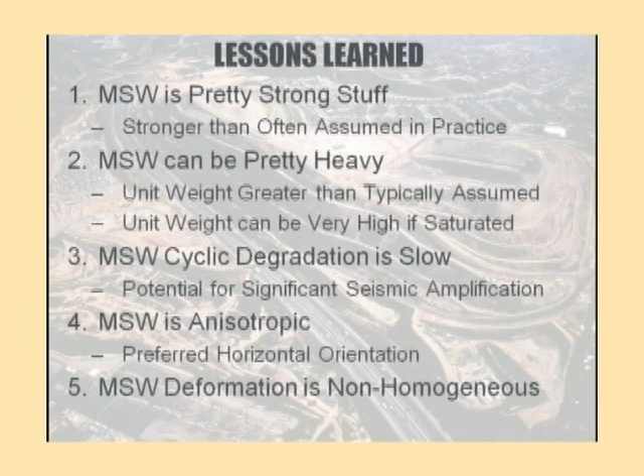Well, first and foremost, we learned that municipal solid waste is pretty strong stuff, certainly not characterized by a friction angle of 20 degrees. So it's stronger than often assumed in practice. Also, municipal solid waste can be pretty heavy, the unit weight is greater than typically assumed. I didn't mention this, but in the saturated zones, we were getting unit weights on the order of 130 pounds per cubic foot. That's actually gotten more relevant today as people move towards bioreactor landfills, where they're introducing liquids into the landfill, and I review the designs for these landfills and they're still using 85 pounds per cubic foot as the unit weight. No, that's not what it's going to be if that waste is saturated.

The cyclic degradation of municipal solid waste is relatively slow. We had that upper bound modulus curve, and there wasn't a lot of modulus degradation in the earthquake. That increases the potential for amplification of earthquake motions. In fact, when we first got involved in OII, there were some papers that suggested landfills will never amplify earthquakes. Well, landfills are just like any other earth structure, an earth dam. If you have a motion that matches the resonant frequency of your waste mass, you're going to get amplification, and you need to consider that in design.

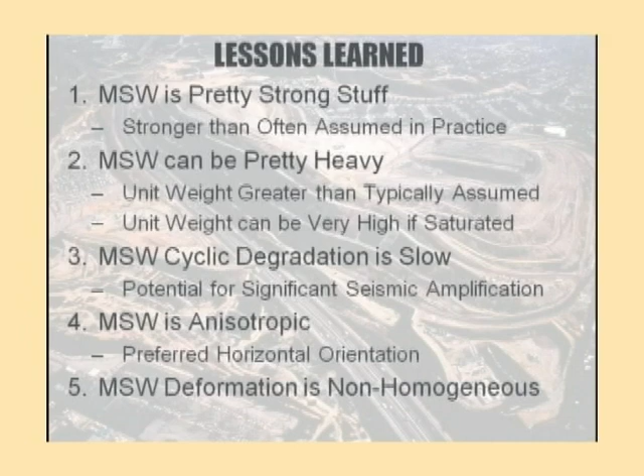Solid waste is anisotropic. There's a preferred horizontal orientation to the waste, to the structure. That's something you may want to consider in your stability analyses. And the deformation of the waste is non-homogeneous. So it's good to do monitoring, but I wouldn't get overly concerned if one point showed a sudden increase in settlement. We're still monitoring the deformations of the landfill, and we see that occasionally one point takes off, and for a couple of months it really settles, then it stops and goes slowly again. So we see a very non-homogeneous pattern of deformations.

Contributions to practice from OII.

The in-situ unit weight testing method—we've now used that on four landfills. We've got some really good data on what the unit weight of solid waste is, and we published that in the ASCE journal about two years ago.

Field classification system for waste—we've also used that on several landfills. There's a paper that's been submitted for publication to describe that field classification system. We've made some modifications to it since OII, but it's basically that same classification system.

We've gotten some good data on waste composition. We found that typically there's a lot of soil and soil-like material in the waste, and that the percentage of soil and soil-like material can influence its properties. One reason that's important is because landfill owners now are going towards alternative daily covers, where they don't put as much soil on the waste anymore—they'll put tarps on it and take them off every night. So the composition of the waste is changing over time as our landfilling practices evolve.

We have our MSW shear strength envelope, our bilinear envelope. There's been a lot of other envelopes that have appeared in the literature since then—Tim Stark's got one that's 35 degrees friction angle and 20 kPa cohesion. I like my bilinear envelope, I'm sticking to that story. But I believe that's a lower bound envelope too, that the waste can be significantly stronger than that.

We learned a lot about the compositional effects on both strength and compressibility of the waste, as well as dynamic behavior. We've continued to build on that with our recent NSF project with Texas and Berkeley.

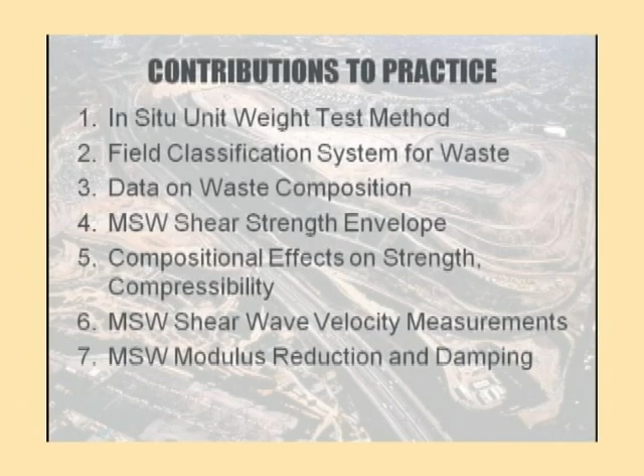Not only did we get shear wave velocity measurements at OII in this project, but we took advantage of having mobilized the VibroSeis and Professor Stokoe, and we took a little bit of money from NSF for a post-Northridge investigation, and we went to seven or eight other landfills in the Los Angeles region and got shear wave velocity profiles for them. The resulting shear wave velocity profile is still the one that everybody's using for seismic analysis of solid waste—I don't know if there's another one out there. I guess there are one or two others since then, but that seems to be the preferred shear wave velocity profile. The modulus reduction and damping curves from OII are still the only ones; those records at OII are still the only records we've ever captured on a landfill in an earthquake.

These five papers are solely on OII, but I note that OII data—modulus reduction and damping curves, unit weight curves, shear strength curves—are reported in 17 additional journal and conference papers, one California Division of Mines and Geology special report, one additional journal paper that's been submitted for publication, and hopefully this Peck lecture when I get around to writing it up and submitting it for publication. So this data is out there for use in practice.